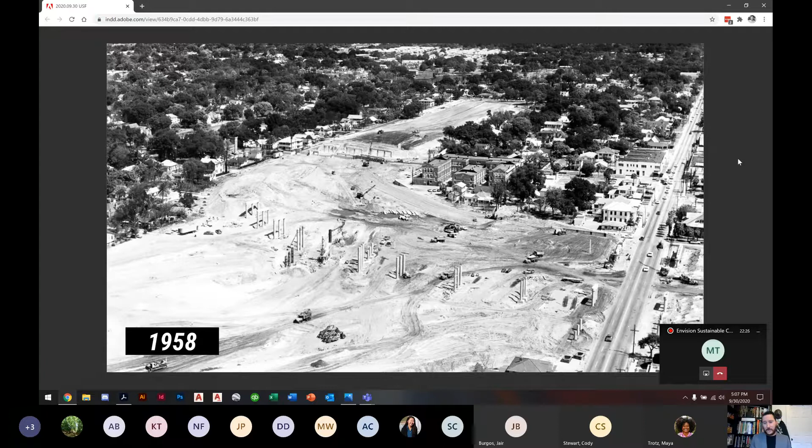That photo of that middle school in that dense urban form is this building here, in the middle of the photo. This is the clearing for I-275 where it meets I-4, also known as Malfunction Junction. And that's Nebraska Avenue on the right.

So at the end of everything, with this school here in the foreground of this photo, we ended up with this massive infrastructure project that altered the urban landscape in the city of Tampa and the rest of the country ever since. It's been a problem that we've been dealing with the after effects of for quite a long time.

In this photo, for example, there's at least 5 or 6 neighborhoods that are now completely detached from one another, except for maybe 1 or 2 underpasses. Today, that school was acquired as part of a right-of-way acquisition by FDOT. They tore it down and built this bus stop out of the bricks. So it's emblematic of how we've treated our public realm, our architecture, our cities, in deference to some of these larger infrastructure projects like interstate highways.

So I'm going to talk specifically about 275, and I want to go through the history of it and the impacts of it, and then what we can do about it. The portion that I've analyzed and studied and talked about really starts at the junction at I-75 and touches every transect in the city.

From very environmental lands up in the New Tampa, Carrollwood area, through some of our newest suburbs, our middle-aged suburbs, the university area, pretty much straight through what was originally Central Avenue in Tampa. So it was built literally on top of Central. Over the river, through some of our most impoverished neighborhoods, through some of our most vibrant urban neighborhoods, our historic neighborhoods, historic districts, all the way to where it terminates at a junction with I-4. So that's the segment I want to talk about specifically today.

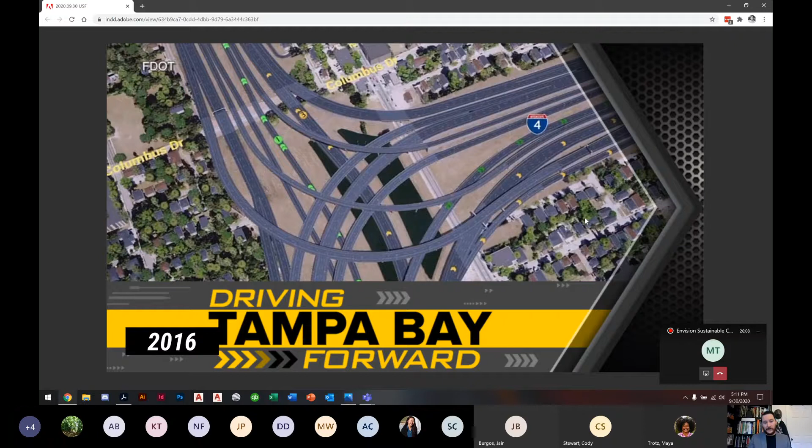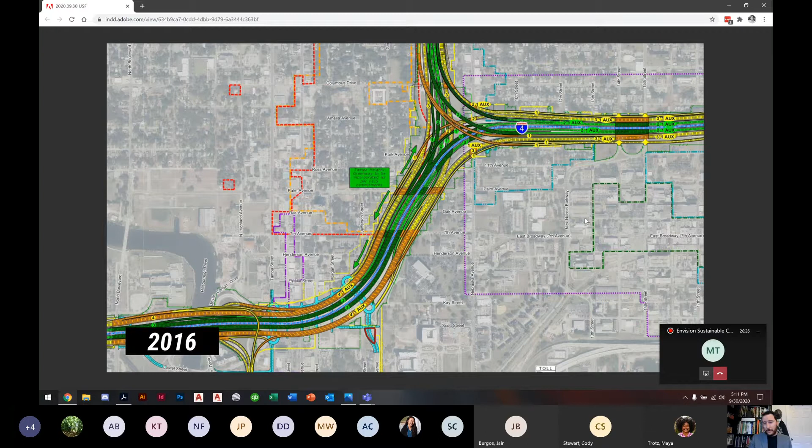So this was part of a statewide effort, but locally, this was the presentation given to expand 275 and the interchange, and this was the final version. You can see essentially those green lines are the toll lanes, and the widened portions are those yellow and orange general use lanes, with a blue lane in the middle which was supposed to be high-speed rail at some point.

So in 2016, that was presented, and I was still at USF in research at the Florida Center for Community Design and Research at the School of Architecture. We were hired to talk to the community about how we could make this project better. FDOT really wanted to know, essentially, unfortunately, where do you want palm trees? What can we fix while we're breaking the interstate up? And how can we help people get around during construction?

That's all they wanted to know. There was really no genuine effort to discuss the project beyond that, which was really disingenuous and unfortunate in a lot of ways, but it was a great learning experience.

And one of the things that I learned and heard from quite a bit in the community was that folks just really didn't want this project in a lot of ways. So I was at the final presentation because my boss was sick, and I gave the presentation to the round table of elected officials, state representatives, you name it. And essentially, FDOT didn't want to do anything the community wanted and only wanted to build the road, basically. Their biggest reason was they didn't want to pay for maintenance, if you can believe that.

So that led to a community uprising and a revolt, essentially, amongst activists, city representatives, community groups, myself, and a lot of other folks. Essentially what happened is we were able to beat FDOT and push this project off in a lot of ways. There was a lot of pushback from the state. At the time, Governor Scott had a heavy hand on this project, and we saw everything from local officials resign to protests and marches against the project, which was called TBX at the time.

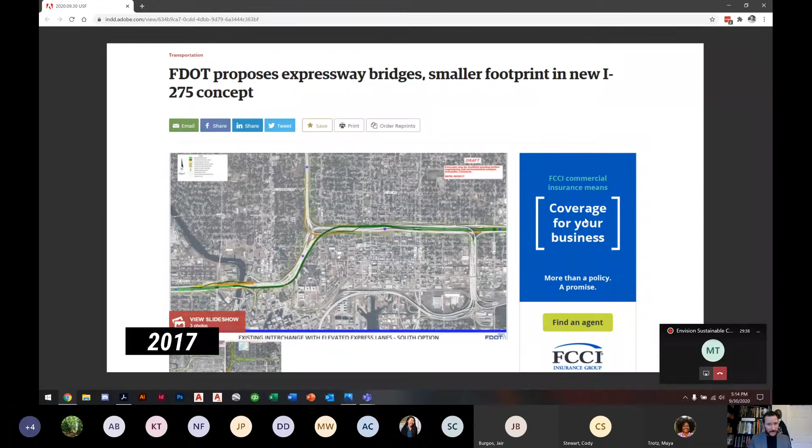But still, nonetheless, it was a massive multi-billion-dollar project. So it was about that time that I used my thesis for my master's in urban and community design to look at alternatives that I heard from the community, which was essentially: what can we do that's not expanding the interstate? I really had no answer prior to that.

It was an open-ended question, and it made a lot of news and press. I was in national and local news and was able to talk to local agencies, MPOs, about the project, and it really did gain a lot of traction. I'll talk about that in a little bit.

So I want to get now into the reasons why I think the interstate is expendable. This is maybe the aspirational part of this project—I think we can do a lot better, and I'll tell you why. The first thing I'd like to do is talk about what we know the interstate currently does before we talk about what it can do.

They were originally built with the intention of being regional connectors, but really what they ended up doing was accelerating sprawl. As a result, 275 specifically, as it goes over what was once the center of the city, carries mostly people going 1 or 2 miles. In fact, 2/3 of the traffic on 275 is between USF and downtown.

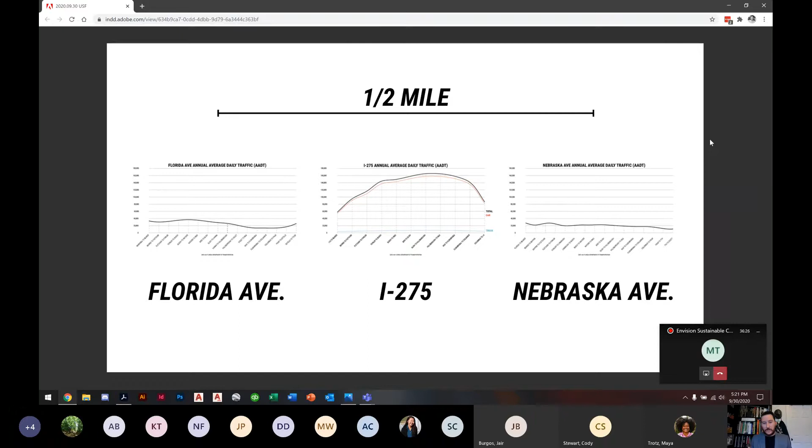When this area was not interrupted, when the grid was not interrupted by the interstate, that was essentially a 5-minute walk to get groceries. Because of the interstate, we have now limited our access to groceries, food, pharmacies, and other things from a manageable walk to a drive that is now faster. So that choice is by and large made for those people. It's a much more inhospitable walk than it used to be, in addition to just the sheer geometry of it. But if it's between a 3-minute drive and a 5 or 12-minute walk, people are going to drive. That compounded over 11 miles makes a big difference.

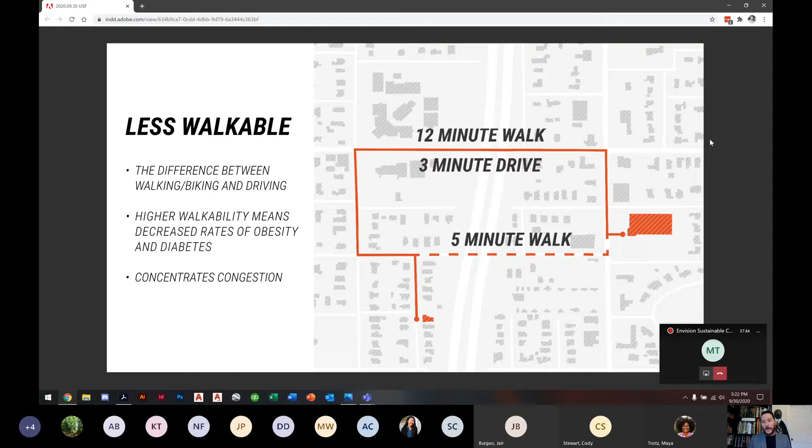I'll talk a little more about how we can reverse that, but that's a big impact. You've now added trips to the network in cars when people should or could mostly walk or bike.

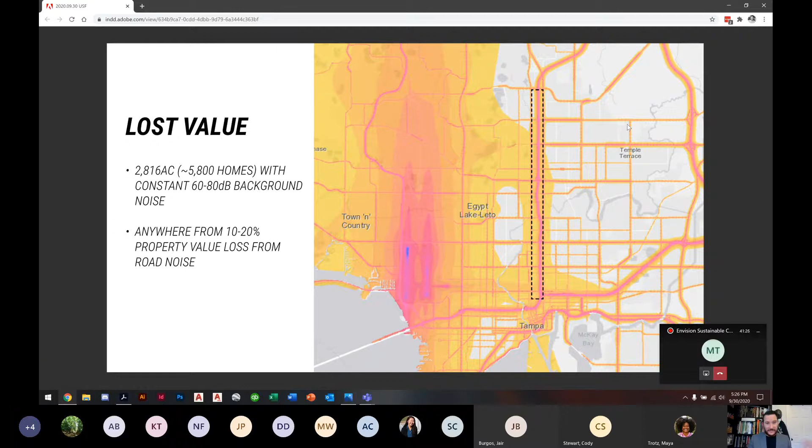So that's just noise pollution, not including air pollution with fine particulates - that's just emissions. There are also studies now about disintegrating rubber from tires, and how tread wear can accumulate and contribute. If you live within a certain distance of an interstate, you will have experienced the black soot that accumulates on your windows, porch, and pretty much every exterior surface.

I lived in Ybor City for 3 years, just south of I-4. Our porch had black soot on it pretty much weekly, daily. That is carbon, heavy metals - it's cancer causing, carcinogenic. That by itself is a major health hazard, to the point where a lot of areas in Europe are recommending that no homes be zoned or built within 500 feet of major roadways because of the increased risk of asthma, heart disease, other illnesses.

But the other part of this in terms of health is walkability. If people are walking less to the grocery store and driving more, they are less active. So we've seen at an aggregate level that people who live within a certain distance of this corridor do suffer higher rates of asthma, cancer, heart disease, and other issues.

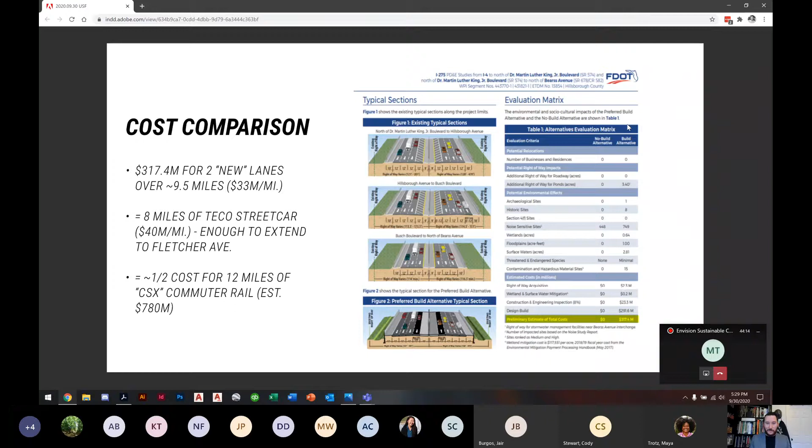The interstate system is massive and incurs hundreds of millions, if not billions of dollars of cost and debt to bond every year. Toll lanes have shown to never make a profit - they only barely pay for maintenance. And then with all the other detriments to property value, interstates are inherently a net loss. They're never really providing value back to property in a way that's a good return on investment.

All of these subjects are a thesis in and of themselves, so I'm just giving you the quick bullet points. I apologize if it's a lot, but it's a very dense subject.

I-275 is better as a boulevard. I wanted to pause before I get into that because this presentation is a little bit old - I have since added a whole other component I want to talk about because it's super important. I want to talk a little bit about equity in this decision and how we can use the value we can create to build equity.

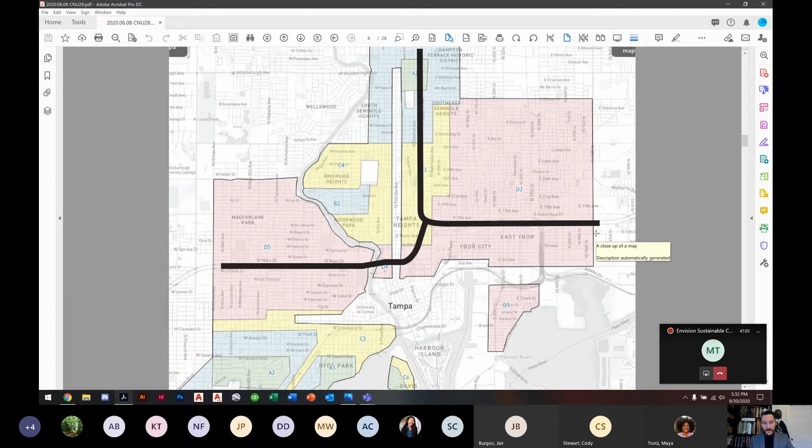So this is a series of graphics. I can upload these, but a firm called Kronberg presented these at the ULI, the Urban Land Institute, and it was just incredible how well things overlaid with one another.

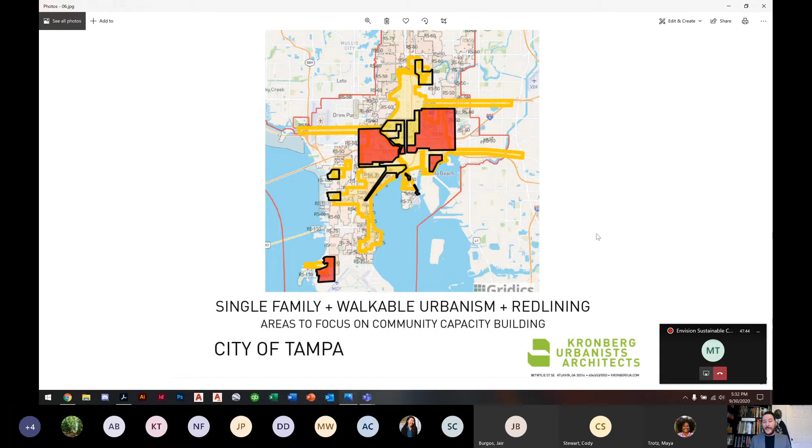Essentially, this is the combination of the redlining neighborhoods, the available housing, and the walkability of those neighborhoods. These are still some of our premier neighborhoods, but through gentrification and through the interstate removal potential, these are also areas where we have to do better, because there could be a massive amount of displacement. So we have to pay special attention to that sort of information.

I think that was all I wanted to show about that. Let me skip back to the next steps. I've gone over a whole lot, and there's a whole lot more reasons why the interstate is essentially antiquated and insufficient for what we need it to do. I'm going to go through now what I've pitched and proposed as a solution to accomplish more and be a better project for all of us.

I believe I-275 is better as a boulevard, and the reasons it's better are many. This is essentially the key difference: it's 6 lanes elevated today, and in the future is potentially 6 lanes at grade with all the other great things we can do with it. It's really not that crazy — it's 6 lanes to 6 lanes with more stuff.

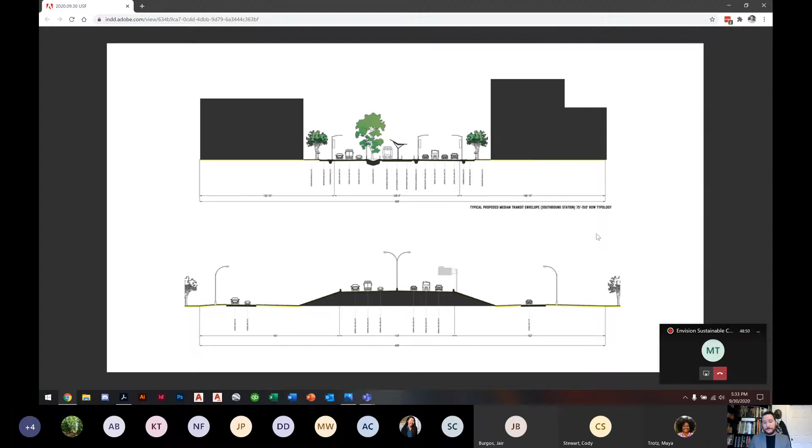The first reason I-275 is better is because the use has changed. We need to design for those 66% of people who are using that corridor locally, because those are the majority of trips, and they are the easiest ones to shift into a different mode. This is not a war on people who are driving in this corridor — you can still drive here — but if we can get a certain percentage of those people into transit, on a bike, or walking to their destinations via smarter land use, all of these different components, then we can really start to actually solve congestion.

As I've said, expanding the interstate and expanding any roadway does not solve congestion. It only adds more cars. So we have reached a point at which we need to start reducing cars.

There are cities like Vancouver, which set a high goal that said they want half of their population riding their bike to work every day by the year 2030. They have met that and are already working towards 75% of their population. We've seen cities like Paris completely change from an auto-oriented public realm and transportation system to one that is so varied you can basically choose whichever way you want to get to work or get your groceries. We need to start that mindset now, because what we have done and what we're continuing to do is really unsustainable.

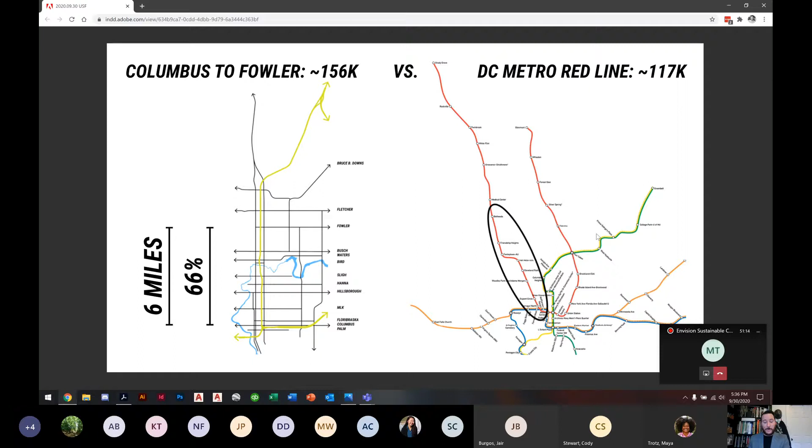In Washington, D.C., which is a fairly similar scale city in a lot of ways to Tampa, that same physical distance of 6 miles on a DC red line carries about 120,000 people a day. So really, it's a matter of what's the best option to carry more people more efficiently. And it is possible to carry more people, even with the growth we see in population.

The second reason it's better is because those regional trips are a third of the amount in the corridor, and they have a lot of alternatives. Not only do they have 275 now, but they've got I-75, the Veterans Expressway, the Suncoast Expressway. People like to think we have 275 and I-4, but we really have about 6 or 7 different interstates in our area.

One advantage to potentially keeping 75 and saving that as a regional component is that it shares pretty much all the same exits as 275. So it's redundant, and there's significantly less impact with doing anything on 75.

I'm not in favor of interstates really to begin with, but if they have to do something, and FDOT is a very big machine, if they do have to expand because of whatever mandate from the governor's office, I'd argue letting them do that on I-75 is a better outcome if we can reclaim 275 as part of our infrastructure. Really, the difference in time is negligible. It's a 3-minute conversation. Why would we spend billions of dollars to make 275 3 minutes faster?

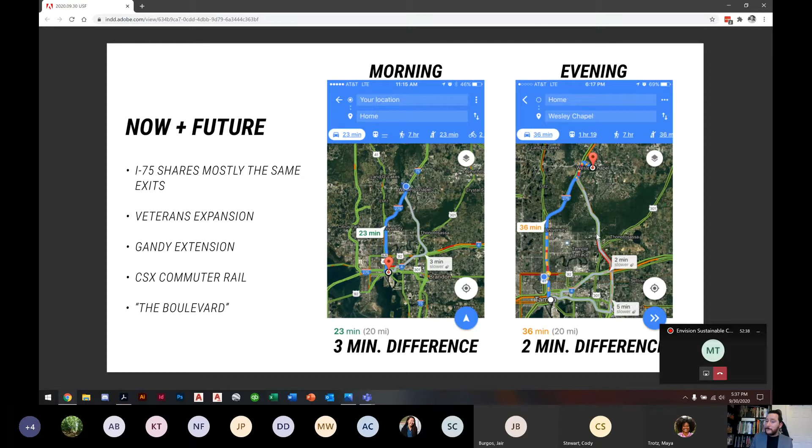The third reason is because development will follow. A project similar to this happened in Seattle, where they removed this double-decker freeway called the Alaskan Way Viaduct. That was reconfigured as a boulevard, and for the past 10 years or so since the project was announced, one property adjacent to it has sold every 11 days. The total property tax revenue the city has seen because of this was enough to pay for tearing the interstate down, replacing it with a boulevard and a tunnel, and a new waterfront park, with about $3 billion left to spare.

So the economic possibilities with converting this to developable land, adding it back to the tax roll, and bringing those depressed property values back up to market is extremely valuable for metropolitan areas that rely mostly on property tax to fund services. That's without going into creating overlay districts and other things that can value capture and put that back into the community. So this is just straight property tax revenue. There are other ways to even tap into that even more.

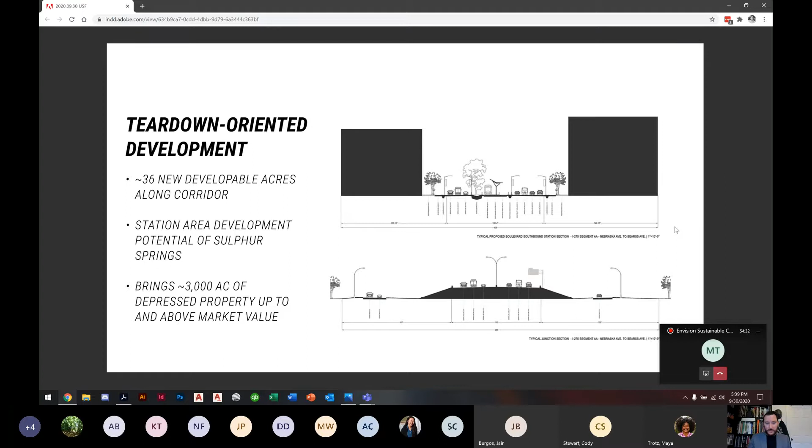Here's an example in Tampa, the Bearss Avenue exit. Right now the interstate is more than just 6 lanes, it's got a semi-cloverleaf exit that ends up being almost 2 downtown Tampa blocks wide. On that scale, converting 275 to a boulevard brings about 36 new developable acres back onto the tax roll, in addition to raising existing property values, which is about 3,000 acres worth of existing property that's been depressed.

The other thing is we have more control. Today, if there's an accident on the interstate, it basically shuts the whole system down. If there's an accident on Dale Mabry, it doesn't do that, because we have the ability to close an exit or close a signal and reroute traffic through the grid one block around it in any direction.

That also extends to hurricane evacuations. We're seeing now that best practice today is not to use the interstates to evacuate, because everybody wants to use them, and if there's a breakdown or somebody runs out of gas or there's an accident, it's going to really significantly impact the resiliency of our ability to evacuate.

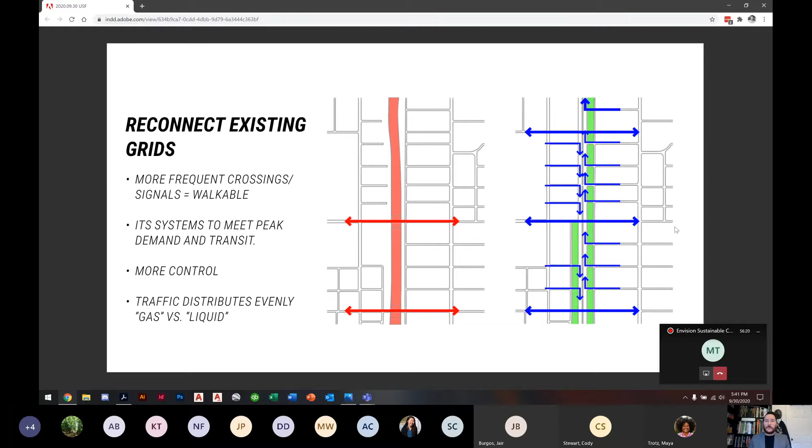So utilizing potentially transit, smarter land use as a way to handle evacuations is also something on the table, I think. At the same time, closing an interstate down and reversing all the lanes to get people to evacuate to Atlanta or wherever is not a great use of resources, because it takes one police officer or one unit at every exit to make sure people don't get on and go the wrong way. So it's a really poor use of our much needed resources elsewhere in the city.

Lastly, maybe not last, but one of the bigger reasons is it actually does solve malfunction junction. In this scenario, I looked at keeping I-275 east-west and I-4 east-west, just as a hypothetical, also because I didn't want to get completely chased out of town. But I think there's an argument for all of these potentially being converted at some point.

If we started with this one, which I think is probably the lowest hanging fruit, one benefit is we no longer have malfunction junction, which is the cause of pretty much all the backup today on the interstate. FDOT has tried to fix it 3 times, and it's an unsolvable problem. So not having a junction is the only way to solve it.

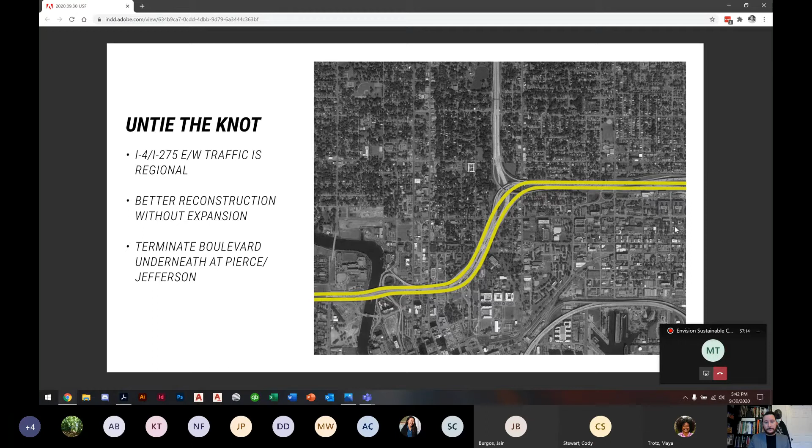Also, transit will work better. This is part of the scenario. As I've mentioned, this corridor was once the center of the city, and so all of our legacy fabric, our built environment, our buildings, our school system, everything is really oriented towards the center of the city along what was Central Avenue. Replacing that with a transit line only better serves all of those legacy pieces of the city.

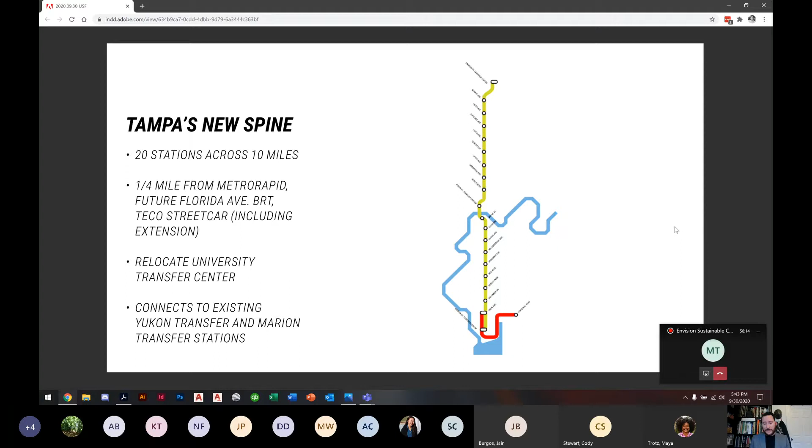So everything from Robles Park and areas along Nebraska Avenue and Florida Avenue to Sulphur Springs, the university area—if we ran a transit line down that corridor, which I've proposed, it's about 20 stations and could be equivalent to what the DC Metro is running with the Red Line. Plus, it connects to everything else: Union Station, downtown, the streetcar extension, Marion Transfer Center, Yukon Transfer Center. All of that is within walking distance of one another and makes for better transit, not just locally but also regionally.

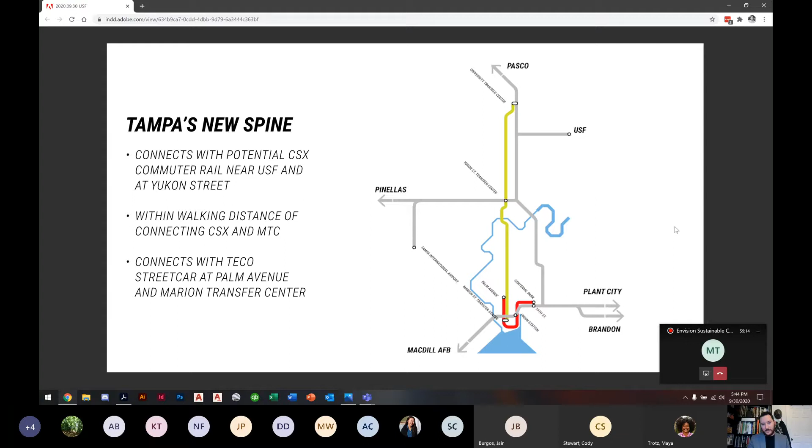So the one-third of folks who use 275 today from Pasco and Pinellas, they also potentially could have an alternative to use transit, and we can reduce that number even further. In fact, I think we have to do that because of the amount of population growth that we're seeing. So trying to reduce trips is key, and we can do that both locally and regionally.

So the last piece—I'm right at the end, trust me, I know I'm at about 45 minutes—is I looked at this sort of hypothetically in a design sense. So I mocked up a handful of station area developments.

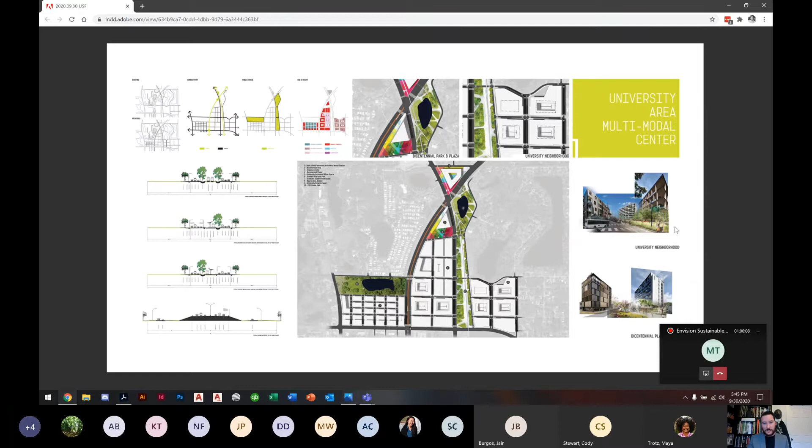This one being at the Boulevard and Nebraska, where they meet. This is sort of an ideal space where CSX tracks are to have a park and ride facility, as well as student housing, graduate student housing, and office, because we see a lot of businesses that have been created as part of USF and entrepreneurial programs being siphoned off to Pinellas County, West Shore, and some of these other areas. But if we can create density around this transit, it also has a better chance of success. And so just some character renderings of what scale we would expect to see in terms of TOD, transit-oriented development.

The Sulphur Springs area—this is one of our most impoverished neighborhoods, and it's been created that way because of the demolition of a lot of other public housing by previous administrations. And so we have an opportunity with this, as one of the biggest undeveloped areas in the city, to provide affordable housing, to provide community programs, and have some of our folks who haven't seen the benefit of this gentrification in these neighborhoods begin to own their first home or start a business. And so this is really a neighborhood that could be very much about restorative justice in that sense, economic justice.

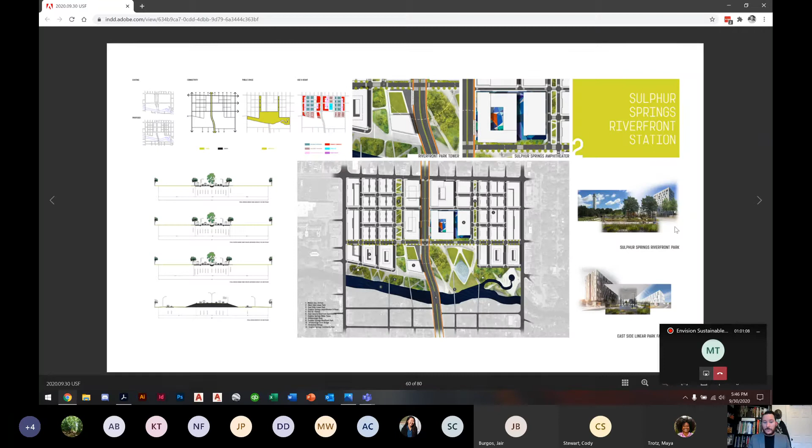And again, one of the other features I didn't mention is expanding the Sulphur Springs Riverfront Park and really creating a great public realm that connects people to the park and the river in a way that's really thoughtful and well designed.

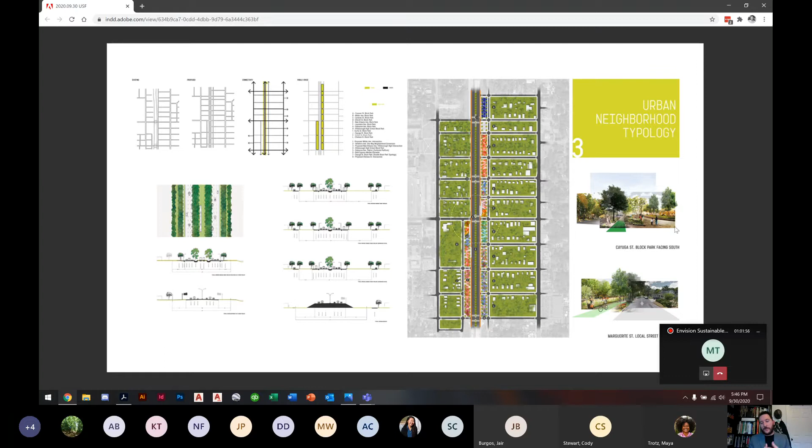There's a sort of third typology that I studied, which is there's a lot of weird leftover parcels that maybe aren't big enough for a building. So what do you do with those as part of DOT's right-of-way? In my plan, I've essentially created block parks and created an extension of the Riverwalk into the urban core as a linear park. Each block gets its own park that maybe they can program with something—if you and your neighbors really like bocce ball, maybe you get bocce ball in your park. But it uses those leftover fragments that are really undevelopable in a way that still creates value, and uses these weird side alleys that were kind of impromptu, or maybe at one point a legitimate roadway, into more of a neighborhood street with cycle track, protected bike lanes, and on-street parking.

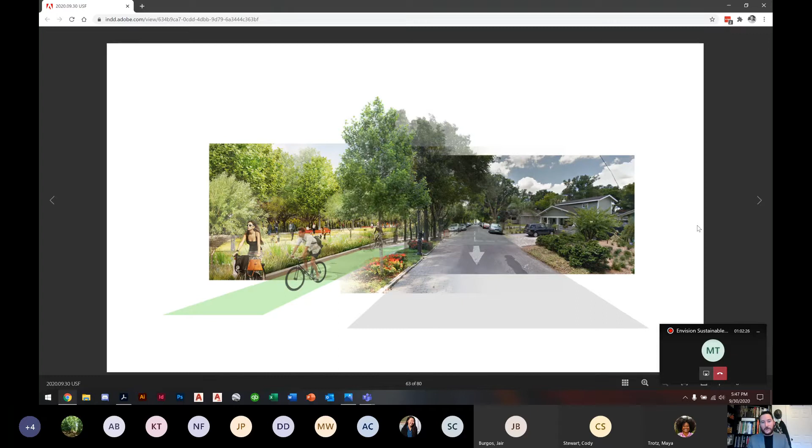And those properties—this bungalow today, I think, is on Taliaferro—the interstate is right here, and there's a wall. Instead of a wall, you'd have a park, and now your property is worth 5 times what it was before.

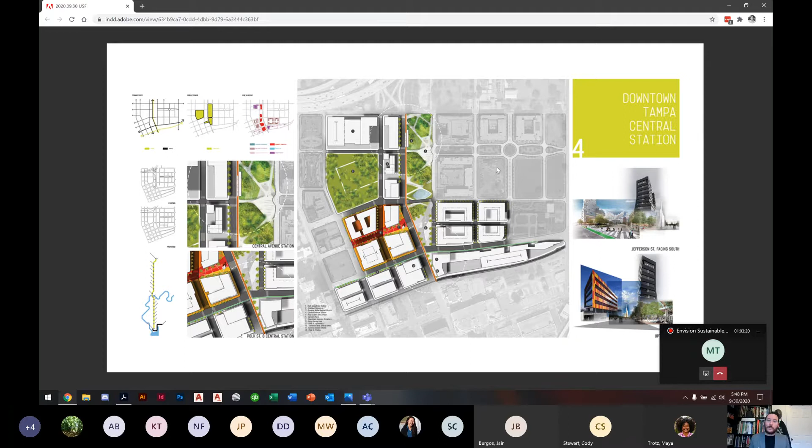And then lastly, the terminus downtown. In this scenario, the boulevard runs underneath the interstate and splits into two one-ways with Pierce and Jackson, which exists today. We can see this whole middle area between North Downtown and Encore develop as one of the most transit-rich parts of the city, because you've got the Marion Transit Center, the streetcar extension two blocks away, the Cass Street cycle track, the CSX lines, and the light rail line in the boulevard, all within 2 or 3 blocks of one another. This turns that spaghetti mess of leftover downtown exit grid back into developable land, with Oaklawn Cemetery, Perry Harvey Park, and completing Encore as part of an affordable housing project within the city. That could be very high-density level development.

And then the last thing I want to show is—that's a lot, and it seems very far-fetched, but it's really not. Cities are inherently reinventing themselves constantly, and we've even seen, in this country, interstates be removed and turned into some of the most vibrant parts of our urban core as we rethink this infrastructure.

The City of Portland had Harbor Drive running along its riverfront. That was removed and turned into a riverfront park, and is now one of the most active parts of downtown Portland.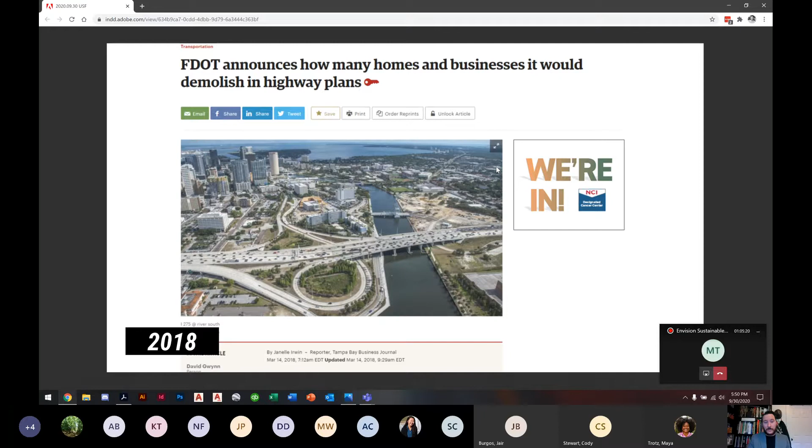So where we're at today with this project is we've won a lot of little battles. Toll lanes are no longer being built on 275—they're being pushed to 75. FDOT is still looking at where to grab property and how many homes they're going to tear down, and how they're going to continue to expand the interstate. We also passed a sales tax for transportation, which is massive.

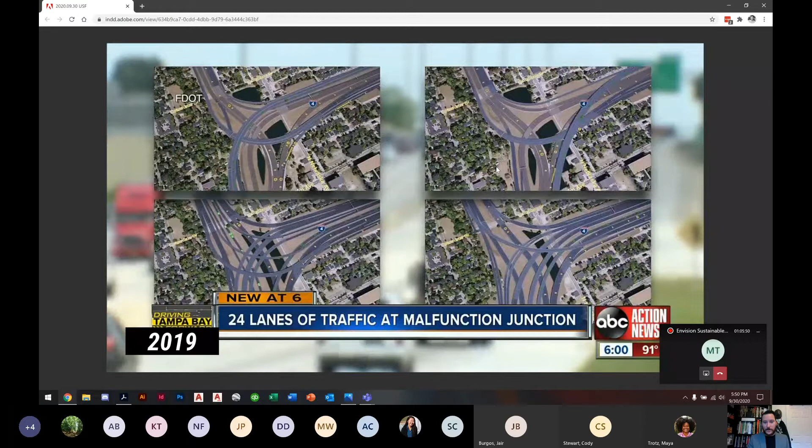We can't just remove the interstate tomorrow. We have to build a system that makes it possible, so funding is a huge question that hopefully will come through at some point. And FDOT continues to FDOT—they've come up with the latest 4 scenarios for how to fix malfunction junction, none of which is good for anybody. There's winners and losers in all 4 scenarios, which is just horrendous.

And it's still part of the work program. But the positive is things are starting to change, and people have heard this. It's not just me—it's a large community out there asking for something better.

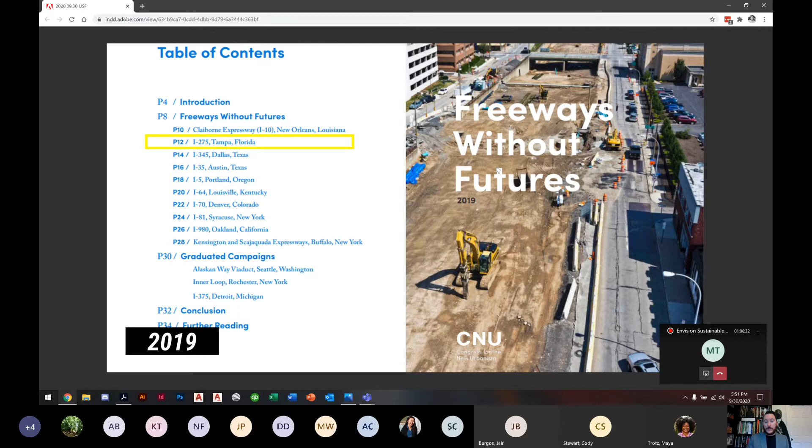In 2019, this project and myself were added to the Congress for New Urbanism's Freeways Without Futures report, along with 10 others. We were peer reviewed, and projects that I've shown you have made this report and graduated because they've been removed. We were peer reviewed, and it says not only can this be removed, but it should be removed. That's a big deal—this is a national list, and making that list was really big.

And officially now, the Hillsborough MPO has unanimously supported further study funding. Because of COVID, things have been pushed back quite a bit, so I don't know exactly when that's going to happen. But there is verbiage in our work program that says this needs to be studied further as a community option, which is pretty significant.

So that's really the meat of the presentation. And Maya, from there, I think we can do all kinds of questions.

Thank you so much, Josh. That was great. So I will open it up for questions. If you all could, turn on your video. Let me do mine too, so Josh doesn't think he's on here alone. But I'm sure some of you have questions.